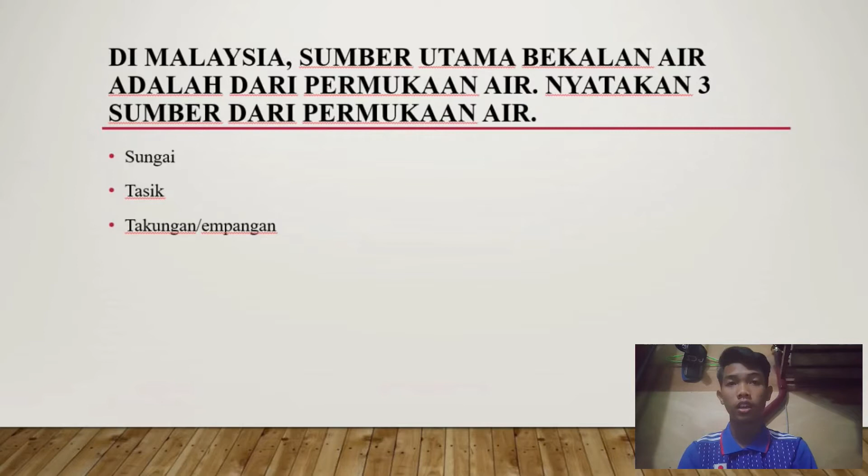Seterusnya, terangkan dengan jelas parameter-parameter sifat air: pertama kekeruhan, dan kedua pH. Kekeruhan adalah air yang mempunyai partikel koloid yang halus, contohnya sisa-sisa tanah yang halus yang terdapat dalam air.

Yang kedua adalah pH. pH adalah ciri-ciri kimia, iaitu sifat asid atau alkali. Dalam loji rawatan air, pH akan mempengaruhi proses penyahjangkitan kuman yang menggunakan klorin. pH juga mempengaruhi aktiviti bakteria.

Soalan terakhir: kenal pasti 3 jenis bahan pencemaran yang perlu dikeluarkan dari air minuman. Yang pertama adalah fizikal, iaitu rasa dan bau seperti bau busuk, gas H2S daripada reputan haiwan, warna air yang tidak jernih, dan kekeruhan iaitu air yang mempunyai partikel koloid yang halus.

Suhu yang tinggi membolehkan kewujudan bakteria. Konduktiviti adalah keberadaan arus elektrik yang menunjukkan adanya garam yang terlarut.

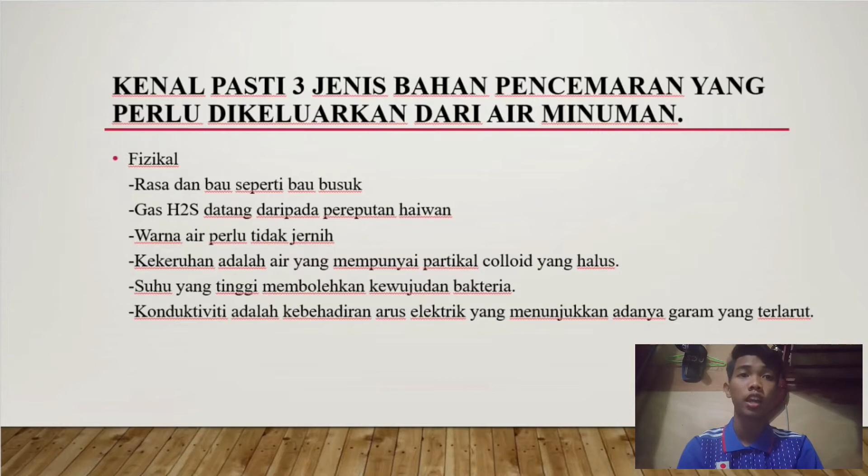Yang kedua iaitu biologi. Bakteria atau kuman yang menyebabkan penyakit dan kematian. Alga adalah tumbuhan akuatik yang paling halus. Virus boleh menyebabkan penyakit demam panas. Protozoa iaitu lebih besar daripada bakteria.

Itu bahagian biologi. Seterusnya kimia: nilai pH iaitu asid atau alkali. Jika oksigen terlarut kurang dalam air, maka pencemaran tinggi. Sebatian organik datang daripada organisma dan tumbuhan yang mati dan mereput. Nutrien iaitu bahan yang boleh mencemarkan air seperti peracunan dan pembajaan.

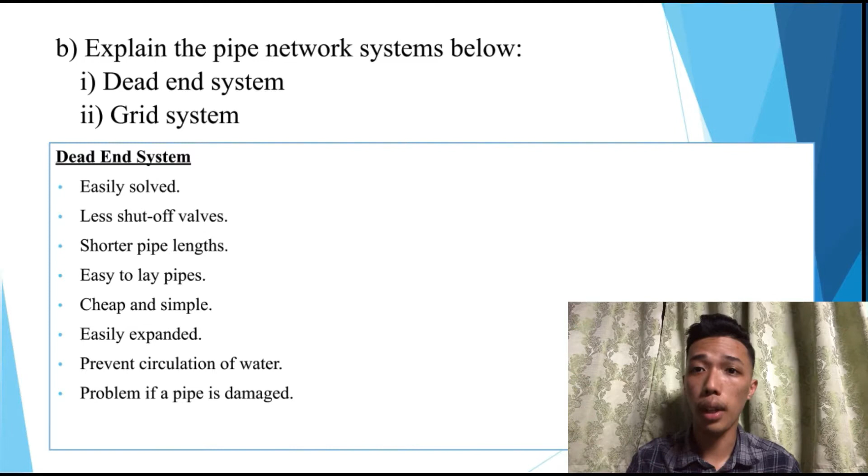Next, grid system: less discharge, friction loss, and pipe size considerations. Not a problem if a pipe is damaged. Good for firefighting. Requires more pipelines and shut-off valves. High cost of construction, and the design is difficult and expensive.

The third question is, interpret the following underground pipe leakage determination methods: first, visual inspection, and second, leak noise sounding contactor. For visual inspection, we use clues to detect leaks like wet soil surface, green grass during drought season, and clean water flowing into the drain.

We can also detect using a chlorine test. The second method, leak noise sounding contactor, is more efficient and accurate in iron pipes, not in plastic. It measures at two suspected points by vibration or sound, where vibrations are transmitted from the sensor to the conductor.

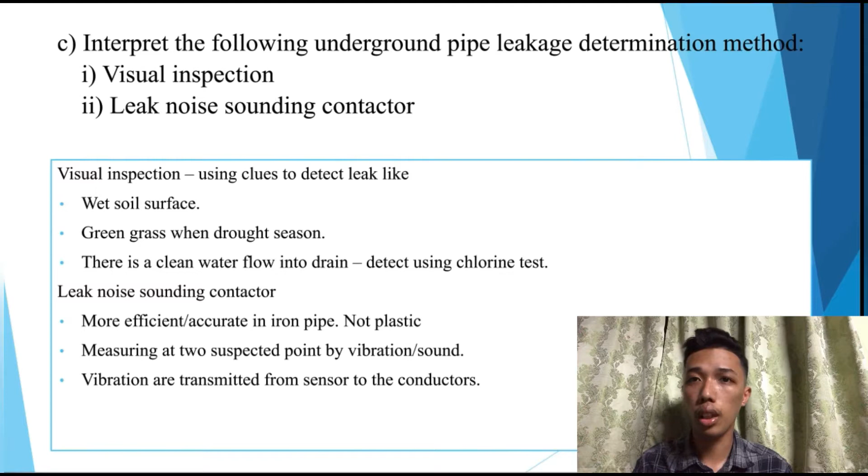The first part: difference between separate system and combined system. Separate system has two pipes, one carrying storm water, the second carrying sanitary sewage. Combined system has only one pipe; sanitary sewage from inside homes and businesses flushes and drains into the pipe, and when it rains, storm water flows into the same pipe and mixes with raw sewage.

Separate system is used in housing and urban areas, while combined system is used in rural areas. Separate system is used mainly in residential areas or cities, but combined system is used in towns where streets are narrow and rainfall is less than moderate.

Advantage of separate system: no treatment needed for runoff and minimum sewer size. Advantage of combined system: installation is easy with less piping, thus saving cost. Disadvantage of separate system is more pipes resulting in increased cost, and the disadvantage of combined system is problems in handling.

Next, we need to calculate the minimum gradient and the flow rate by using the Manning formula. First we need to find the M value, which is 0.0875, and after that we need to find the C value, which we get as 1.4354. After that, using the Manning formula, we get I, which is the gradient.

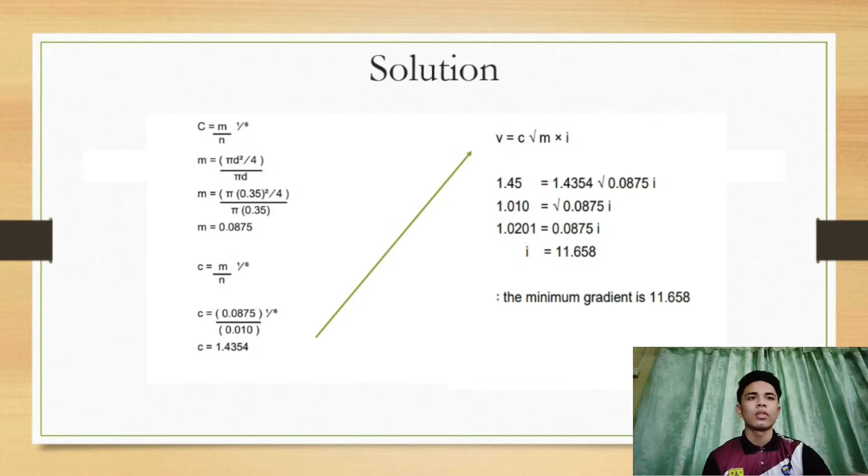V is also given as 1.45, and the minimum gradient we get is 11.658.

Okay, the next question is we need to calculate the sewer pipe diameter needed for that residential area. The data has been given, we just need to put the value into the equation.

Okay, the first one we need to find D, which is 0.0523. After that, we need to multiply water demand per capita times flow rate factor and times how many houses at the residential area.

We get 2,500, and then we need to multiply with the D we get just now. After that, we get the value is 4,314.75. So the answer is 4,314.75 needed for that residential area.

That's all for my presentation.

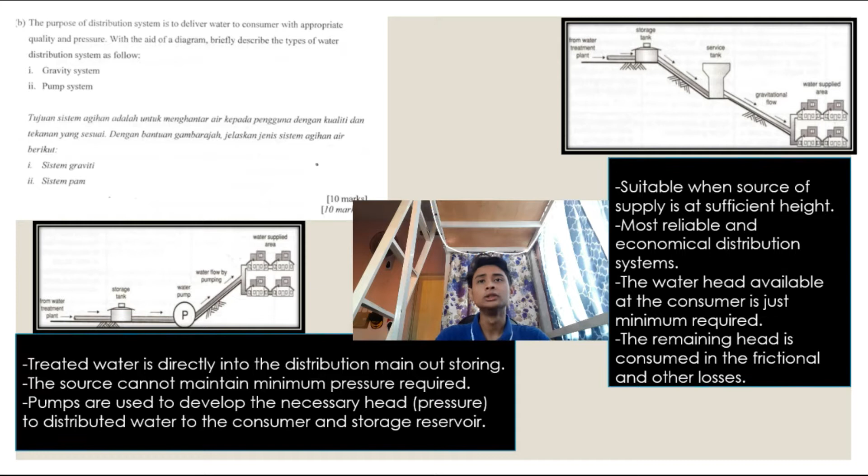For question C, loss of water due to leakage is a common phenomenon observed practically in a water distribution system. However, the leakage volume can be reduced significantly if the occurrence of leakage is detected within minimal time after its occurrence. Interpret the leakage control methods below.

One is gas tracer, the second is passive control, the third is pressure control, and the last one is visual inspection.

For the tracer gas method, a portable gas sensor is used to detect non-toxic gas. It escapes through leaks in the pipe and rises through the surrounding soil to the ground surface. The tracer gas detection machines are fast and easy to use, and also environment friendly.

For passive control, leakage will be fixed based on reports from the concerned community, fixing based on complaint reports, and sometimes considering new piping in the area. This method can be justified in areas with plentiful or low cost supplies, and is often practiced in a less developed supply system where the occurrence of underground leakage is not well understood. It is therefore often a first step to improvement.

The third one is pressure control, used in areas that have high pressure changes. Small reductions in pressure will reduce leakage significantly, but for most piping materials like metal, pressure reducing could become a problem due to internal pipe crusting. Typical methods used are the pressure reducing valve, reducing pumping head, and the pressure break tank.

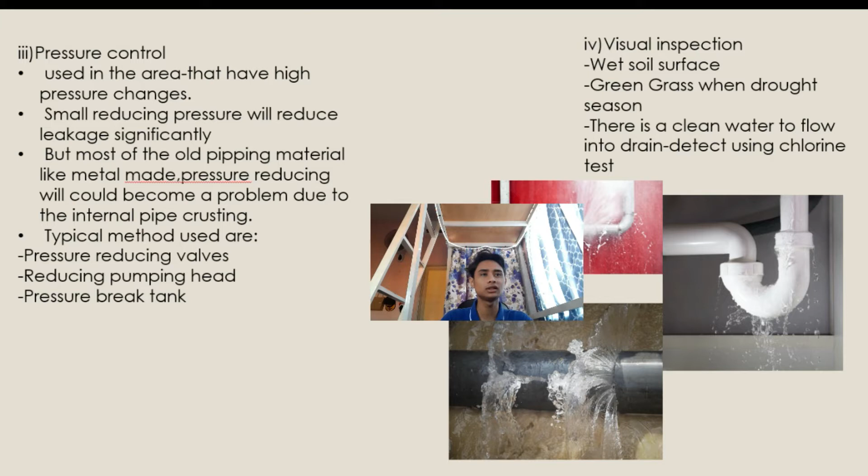The last one is visual inspection, used on wet soil surfaces and green grass during drought season. Also, if there is clean water flowing into the drain, it is detected using a chlorine test. That's all for me.

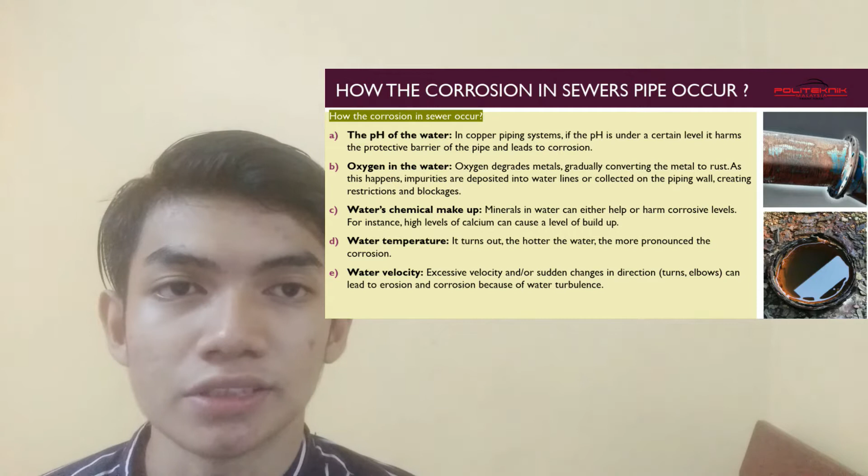Last question is to calculate the flow rate using the Manning formula. The formula given is V equal to 1 over N, times M to the power 2 over 3, times S to the power 1 over 2. The information given is D equal to 2 meters, gradient is 1:1000, the coefficient N is 0.013, and the depth is 1 meter.

The solution is V equal to 1 over 0.013 times bracket pi times 2 squared over 4, over pi times 2, close bracket, power to 2 over 3, times bracket 1 over 1000 close bracket power to 1 over 2. The answer is V equal to 0.2025 meter per second. That's all from me. Thank you.

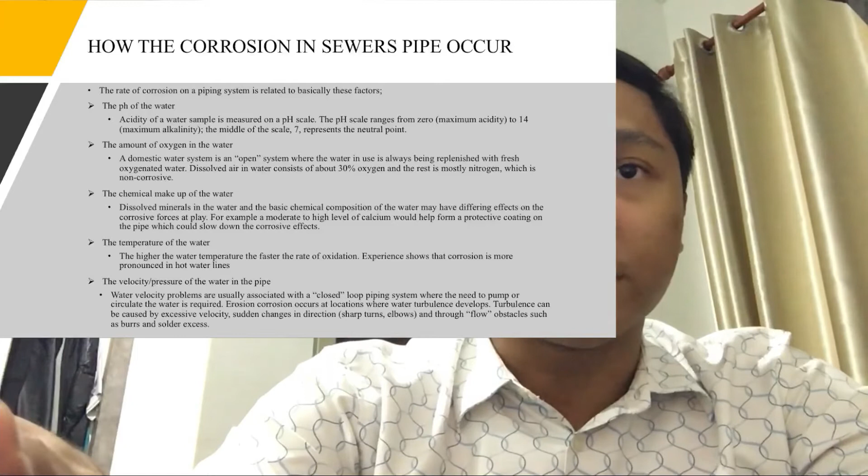Number 4, the temperature of the water - the higher the water temperature, the faster the rate of oxidation. Experience shows corrosion is more pronounced in hot water lines. The last factor is the velocity pressure of the water in the pipe. Water velocity problems are usually associated with a closed loop piping system where water must be pumped or circulated. Erosion corrosion occurs at locations where water turbulence develops, which can be caused by excessive velocity, sudden changes in direction, sharp turns or elbows, and flow obstacles such as burrs and solder excess.

And moving on to the last question, which is calculate the flow rate using the following Manning formula. The Manning formula as given in the slide is V equals 1 over n times R power of 2 over 3 times I power of 1 over 2, or square root I.

The diameter is 2 meters, gradient is 1:1000, depth is 1 meter, and coefficient n is 0.013. So we substitute all the data in the formula.

V is equivalent to 1 over 0.013 times pi times 2 times 2 squared over 4 over pi times 2, in bracket, power of 2 over 3, times 1 over 1000 power of half. So it is equivalent to 0.2025 meter per second. And that's all for me.

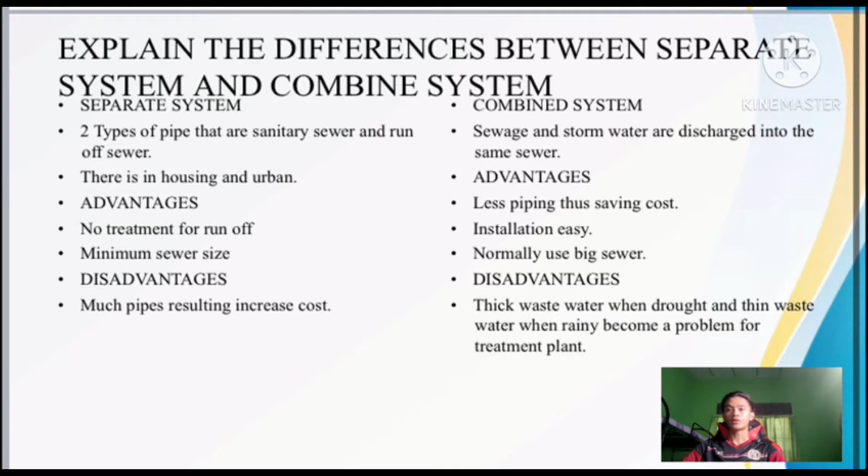Advantages for separate system: no treatment for runoff and minimum sewer size. Advantages for combined system: less piping, thus saving cost, and easier installation. Disadvantages for separate system: much pipe results in increased cost. Disadvantages for combined system: thick wastewater when dry and thin wastewater when rainy become a problem for the treatment plant.

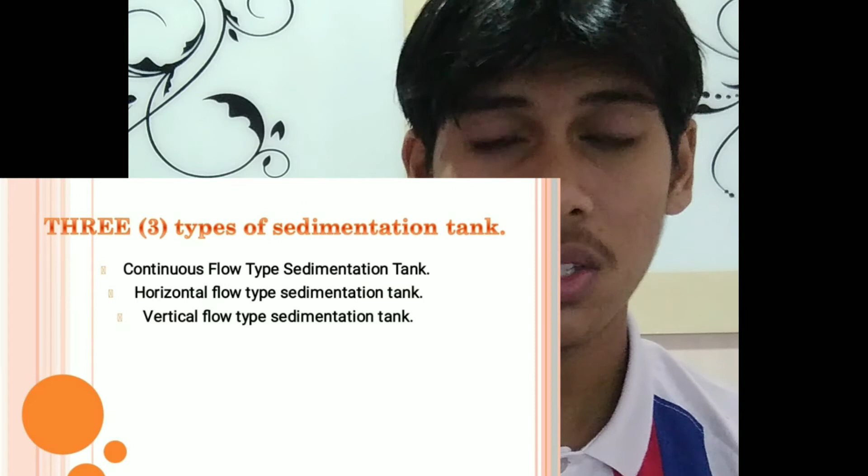Then, the presence of significant amounts of iron and manganese in a water supply. Discuss the problems caused by both metals in a water supply. Iron and manganese are common metallic elements found in the earth's crust. Iron and manganese are not a health concern in drinking water.

Instead, they both have a secondary recommended drinking water standard because they cause aesthetic problems that make the water undesirable to use in the home, and a bitter metallic taste that can make the water unpleasant to drink for both humans and farm animals.

Then the breakpoint curve shape is determined by contact time, temperature, chlorine and ammonia concentration, pH, and water quality. Thank you, that's all from me.

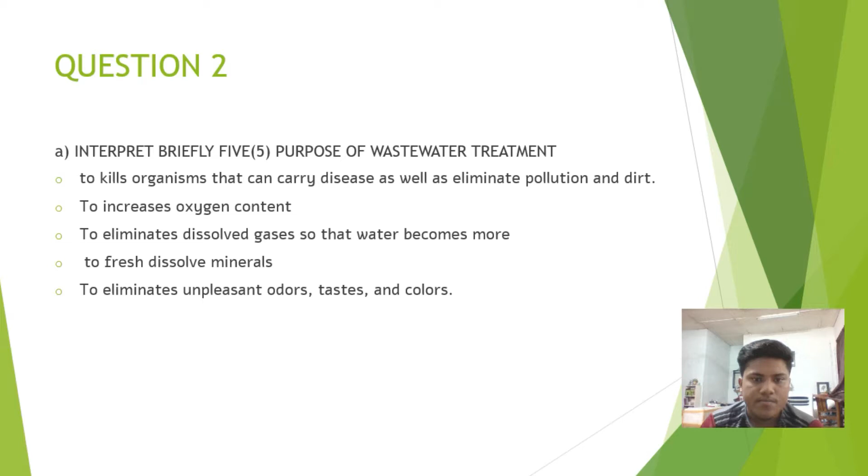The second question is identify 5 differences between oxidation pond and activated sludge. For oxidation pond, it is a shallow basin of controlled shape designed for small communities or industrial plants. Second, the process involves two major steps in the decomposition of organic load in wastewater.

Third, inorganic forms are then used by algae in their photosynthesis reaction. Fourth, photosynthesis is a natural process carried on by green plants in the presence of light. The last is photosynthesis produces oxygen which becomes available to the aerobic microorganisms.

For the activated sludge, microbes require air to live and eat. Second, microbes in this aeration tank use the dissolved and particulate organic load as food. Third, producing more microbes.

The last question is, as a technician, recommend a suitable sewerage system for a small capacity residential in a rural area. For the suitable sewerage, it is the Imhoff tank. The reason why I choose the Imhoff tank is because it was developed to correct the defects of the septic tank. Second, the upper section is the sedimentation compartment and the lower section is the digestion compartment.

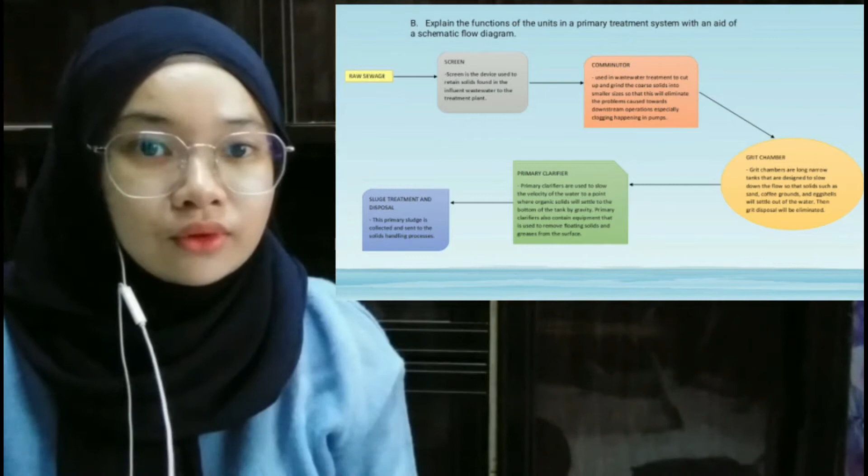Okay, next I move to question B, which is explain the units and the functions of units in a primary treatment system with the aid of a schematic flow diagram. In this diagram, it starts with raw sewage, then goes to screen, then to comminutor, next to grit chamber, then goes to primary clarifier, and the last one is sludge treatment and disposal. As you can see, I have stated the functions in the slide.

Okay, the last question is interpret the operation principles of sewage oxidation pond. The answer is oxidation pond, also called lagoon or stabilization pond, are large and shallow, designed to treat wastewater through the interaction of sunlight, bacteria, and algae.

Algae grows using energy from the sun and carbon dioxide, an inorganic compound released by bacteria in water. During the process of photosynthesis, algae release oxygen needed by aerobic microorganisms. Mechanical aerators are sometimes installed to supply more oxygen, thereby reducing the required size of the pond.

Sludge deposited in the pond must eventually be removed by dredging. Algae remaining in the pond effluent can be removed by filtration or by a combination of chemical treatment and settling. As a result, the organics in the water are partly oxidized and partly converted to algae cells.

Okay, that's all from me. Thank you.

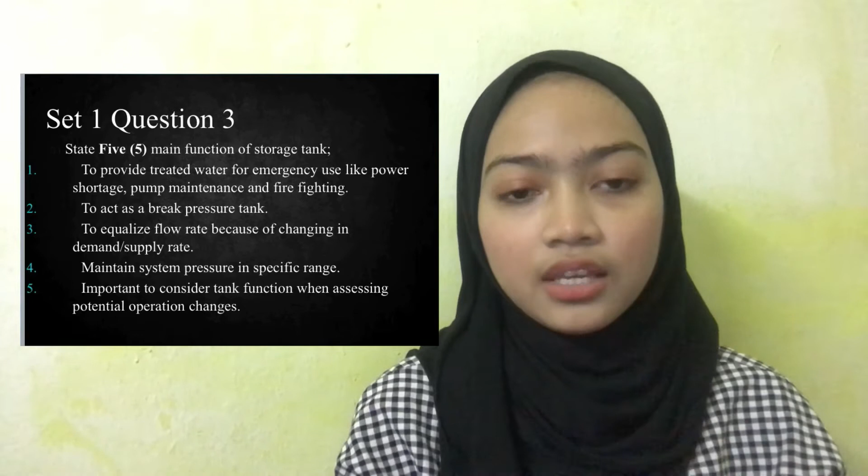A. State 5 main functions of storage tanks. First, to provide treated water for emergency use like power shortage, pump maintenance, and firefighting. Number 2, to act as a break pressure tank. Number 3 is to equalize flow rate because of changing demand or supply rates.

Number 4 is to maintain system pressure within a specific range. And the last one is important to consider tank function when assessing potential operational changes.

B. Explain 5 factors that influence leakage or non-revenue water (NRW). Okay, first is pressure. There are two types of pressure: pressure surge, which is a main danger causing a pipe to burst when the pump stops or the valve closes suddenly, and the second one is pressure change, like minor and neglected ones.

Number 2 is ground movement. As mentioned, expansion and contraction of the soil will cause damage like pipe fatigue.

Number 3 is traffic load. Vibration will cause tiny cracks to the pipe if the bedding is not adequate and proper depth is not maintained.

Number 4 is soil condition. Leaking water in the soil can impair the soil surface because of capillary rise, which will cause the plant to look green, indicating water even in dry season.

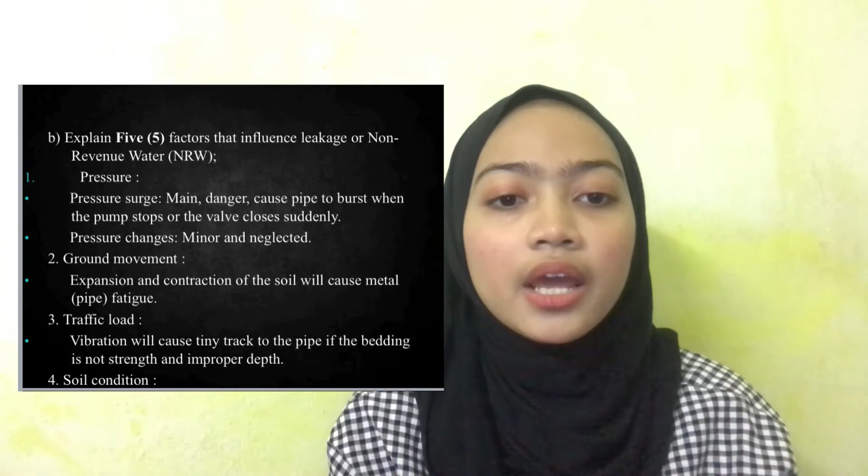And the last one is constant flow valve, to provide an accurate way of controlling flow configuration and used to set flow rate. Question C.

Water distribution method is dependent on the level of source, topography of the area, and other local conditions. Illustrate with explanation the gravity system and pump system.

This is a gravity system, which has an elevated water supply. This system is just like water supplied from a higher place to a lower place, like a treatment plant located at a high ground, supplying to users below.

Friction in piping can cause energy loss, which eventually can cause static head issues. This makes end users experience low water pressure from the tap. The advantages are reliability and low operation cost, suitable for communities at lower ground.

The disadvantage is that static head will cause a drop in pressure, leading to the need for a pump system, which has a pumping station and water supply.

This system is used for low pressure end users and is located on lower ground than the end user, and water is directly pumped to the delivery pipe.

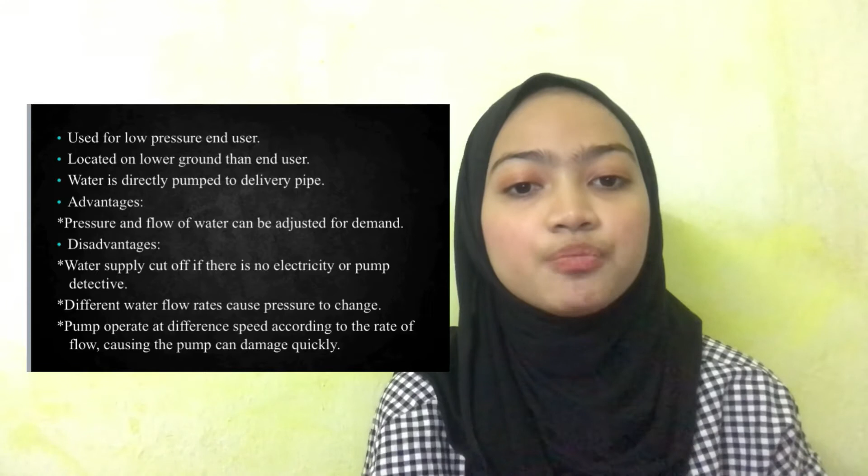Advantage: pressure and flow of water can be adjusted based on demand. Disadvantage: water supply is cut off if there is no electricity or the pump is defective, and different water flow rates cause pressure changes; pump operation at different speeds according to flow rate can cause the pump to damage quickly.

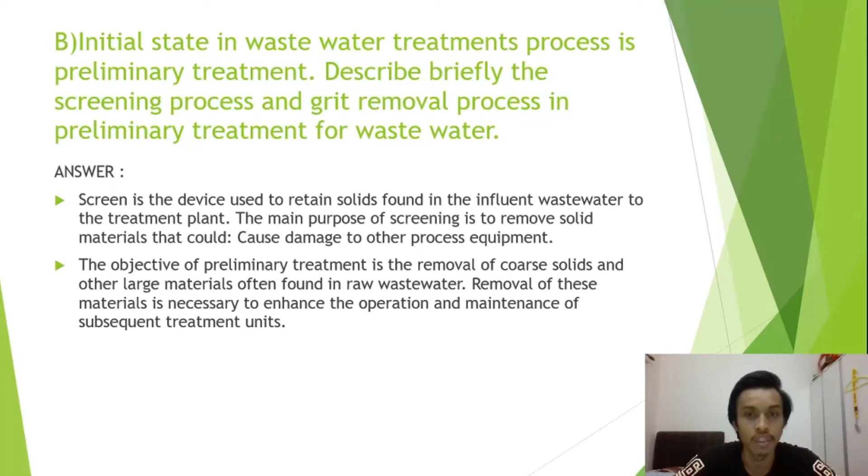The objective of preliminary treatment is the removal of coarse solids and other large material often found in raw wastewater. Removal of this material is necessary to enhance the operation and maintenance of subsequent treatment units.

The next slide is question C. Illustrate how an individual septic tank works. The answer is: a septic tank works by allowing waste to separate into 3 layers: solid, effluent, and scum.

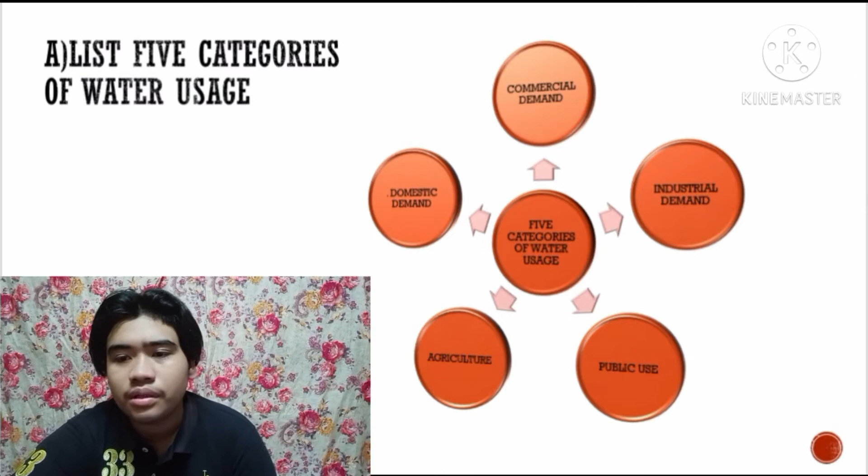The first question is to list 5 categories of water usage. First, commercial demand. Second, industrial demand. Third, public use. Fourth, agriculture. Fifth, domestic demand.

Now we move to the second question: there is a probable population in the year 2040. First, we just need to make a table with year, resident, and resident increase, and fill out the data that we get from the question, from which we can get the resident increase.

The total of resident increase is 83,625, and after dividing by 4, the answer is 20,906.25. Adding this to the resident in 2020, we get 111,777.25. After doing the same steps, the final answer is 153,589.75.

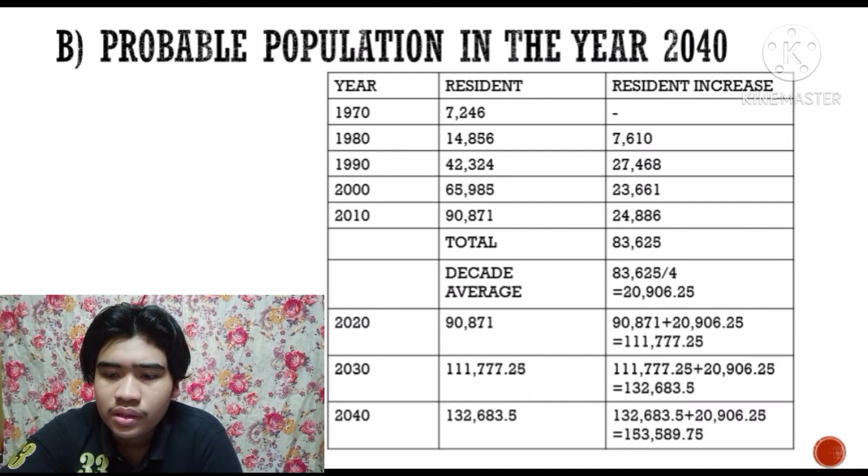Now we move to the final question, which is to find water demand. First, we list the data from the question: total population is 356,000, water demand is 225 liters per capita per day, and design factor is 1.0.

Water coverage is 90%, and NRW is 21%. The formula is WD equals (PN multiplied by Q multiplied by F1 multiplied by F2) plus NRW, and the final answer is 87,228,900 liters per day. That's all.

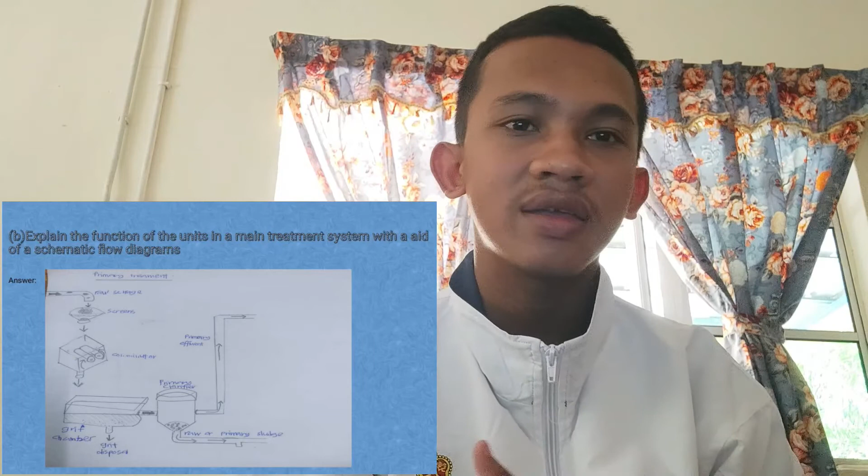Second question is: explain the function of the units in a main treatment system with the aid of a schematic flow diagram. You can see the answer in the slide beside me.

The last question is: interpret the operating principle of a sewage oxidation pond. The answer is: in the first pond, solid and organic matter settle down to form sludge digested by microorganisms.

In the second pond, algae growing on the surface provide water with oxygen, leading to both anaerobic digestion and aerobic oxidation of organic pollutants. Due to the activity of algae, the pH increases, which leads to inactivation of pathogens and volatilization of ammonia. The latter ponds serve for the retention of stable solids and the inactivation of pathogenic microorganisms through pH heating and solar radiation.

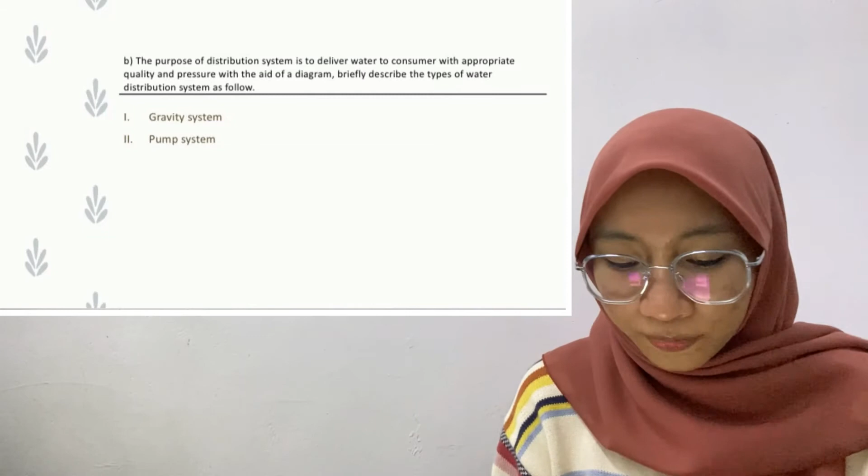Question B: the purpose of a distribution system is to deliver water to consumers with appropriate quality and pressure. With the aid of a diagram, briefly describe the types of water distribution systems as follows: number 1 is gravity system, and number 2 is pump system.

Friction in piping can cause energy loss, which eventually can cause static head. This will make the end user experience low water pressure at the tap. Advantages of the gravity system are: reliable, low operation costs, and suitable for communities at lower ground.

Gravity system also has disadvantages, which is that static head will cause a drop in pressure and cause end users to be unhappy.

Advantages for the pump system: pressure and flow of water can be adjusted for demand. Disadvantages for pump system: water supply is cut off if there is no electricity or the pump is defective. Different water flow rates cause pressure changes and affect the pump.

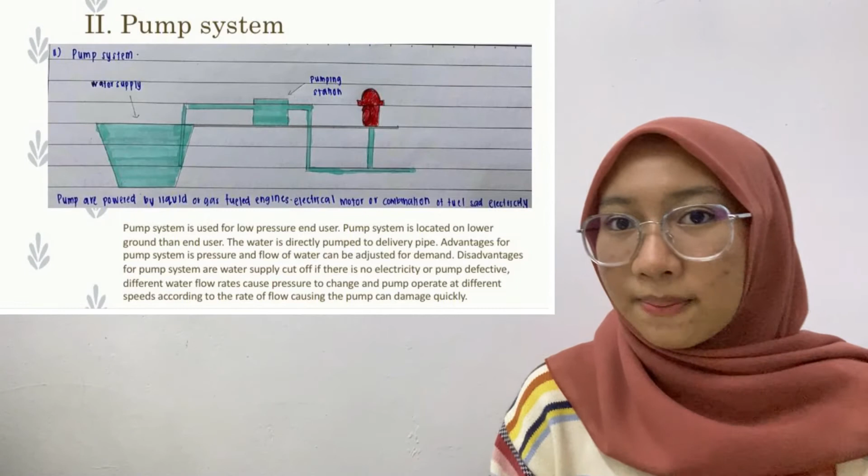Question 4C. Loss of water due to leakage is a common phenomenon observed practically in all water distribution systems. However, the leakage volume can be reduced significantly if the occurrence of leakage is detected within minimal time after it occurs.

Interpret the leakage control methods below: gas tracer, passive control, pressure control, and visual inspection. Gas tracer is one of the methods to detect leakage. It is a portable gas sensor used to detect non-toxic gas as it escapes through leaks in a pipe and rises through the surrounding soil to the ground surface.

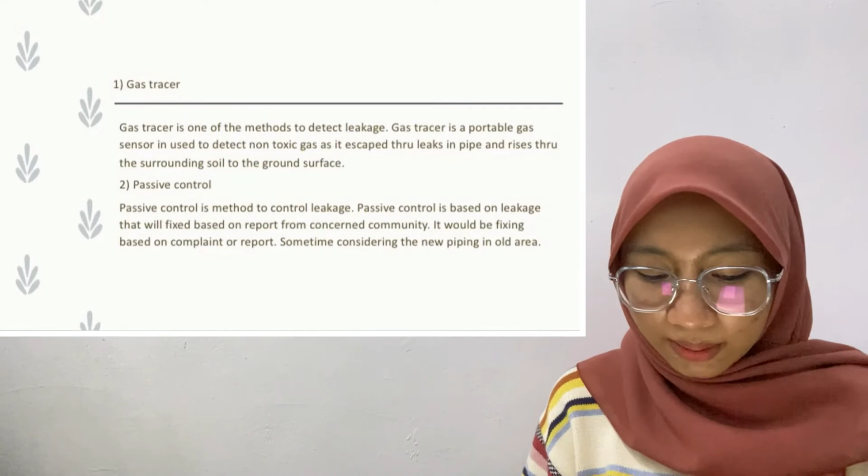For passive control, it is a method to control leakage based on reports from the concerned community. It will be fixed based on complaints or reports, sometimes considering new piping in the area.

For number 3, pressure control: it is used in areas that have high pressure changes. With small reducing, it will reduce leakage significantly, but most old piping material, like metal, made pressure reducing could become a problem due to internal piping crusting.

Typical methods used are pressure reducing valve, reducing pumping head, and pressure break tank. Lastly is visual inspection, which is a method to detect leakage, using clues such as wet soil surface, green grass during drought season,

and clean water flowing into drains, detected using a chlorine test. That is all from me for this question, thank you for watching and bye.

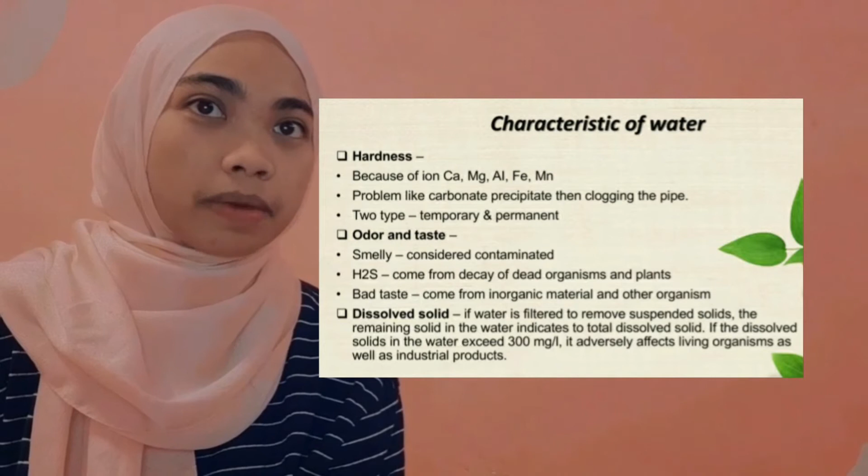Dissolved solid: if water is filtered to remove suspended solid, the remaining solid in water indicates total dissolved solid. pH value stands for the power of hydrogen, a numerical value determined by the molar concentration of hydrogen ions, affecting chemical processes and biological life. Protozoa are much bigger than bacteria and eat bacteria, reducing organic load. If there's too much it can cause problems, but if too little, treatment is not efficient.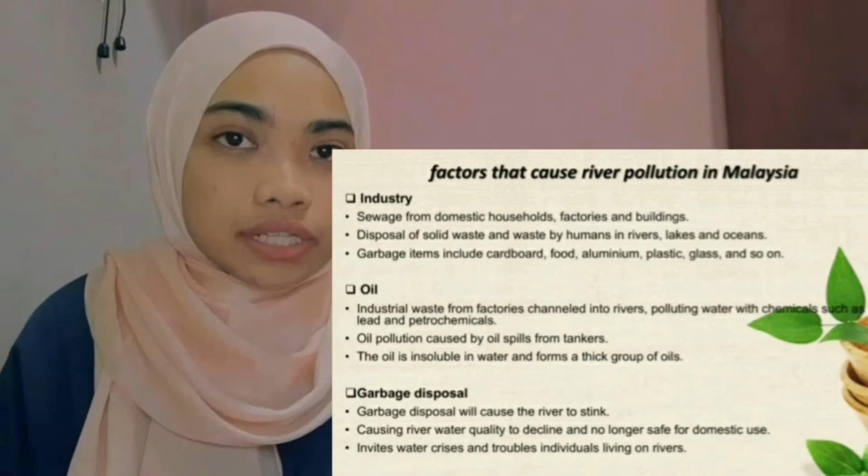That causes river pollution in Malaysia. First, industry: sewage from domestic buildings and factories, and disposal of solid waste by humans in the river. Second, oil: industrial waste from factories channels insoluble material into water, forming a thick layer. Third, garbage disposal causes river water quality to decline and no longer be safe for domestic use, also inviting water crisis and troubles for individuals living by the river.

Fourth, throwing of plastic in the river. It is lightweight and floats easily. Plastics are non-biodegradable and can affect the survival of marine life for a very long time. Lastly is thermal pollution: with rising temperature in the water, it can reduce the amount of oxygen present in the water and decrease the level of aquatic life that the river can support. That's it, thank you.

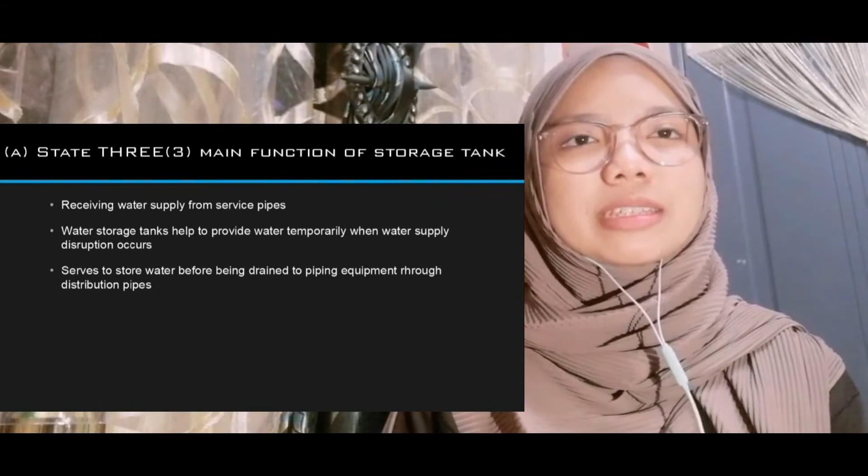State 3 main functions of the storage tank. First, it receives water supply from the service pipe. Second, the water storage tank helps provide water temporarily when water supply disruption occurs. Third, it serves to store water before it is drained to piping equipment through distribution pipes.

Explain with a diagram the layout of the distribution system below. The dead end system is usually found in cities that are not fully planned. This system evolves according to urban development, so it is suitable for cities that grow irregularly, or for housing schemes, as they are low cost and easy for future development.

Second is the grid iron system. In this system, the reticulation pipes and their substations are connected to each other. These pipelines are commonly used in planned urban areas.

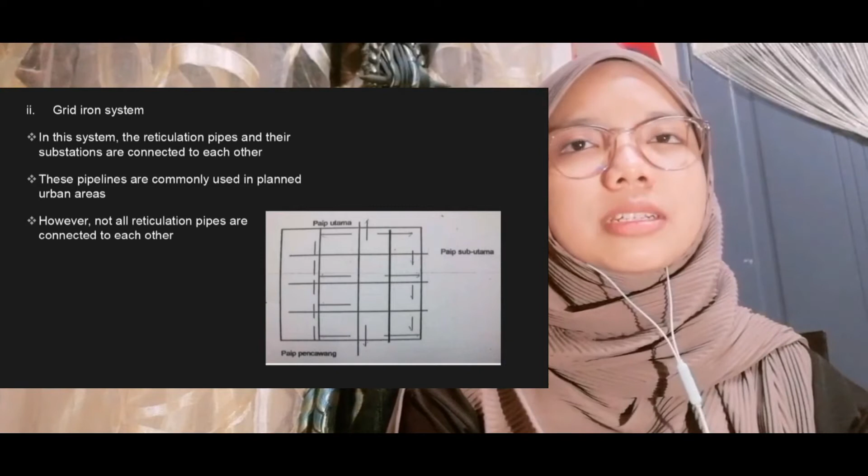List 4 types of valves, one of the components in the water distribution system. First, a gate valve. Second, a butterfly valve. Third, an air valve. Fourth, a one-way valve.

List the advantages and disadvantages of the pump system and gravity system in a water distribution system. In this system, treated water is pumped out at a constant rate to be stored in a high-level water storage. The distribution of water to users from the storage flows through the force of gravity. This system is more often used due to its effectiveness and low cost, and is used in areas with the desired surface area.

Water pumps are used to pump treated water from low ground to be conveyed to the storage tank. The position of the storage tank in high areas creates pump pressure on the water to be conveyed to customer premises in low areas.

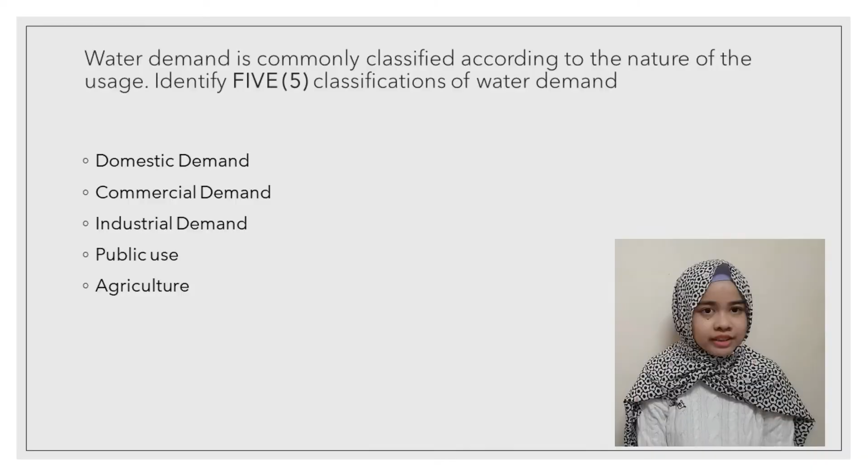Identify 5 classifications of water demand. Firstly is domestic demand, commercial demand, industry demand, public use, and agriculture. Factors affecting demand of water usage are firstly total population served, second consumption per capita, design factor, and lastly additional demand factors.

The process of destabilization is to reduce the charge of the particles and allow them to attach to other particles so that they can be removed in the next process, which is coagulation or flocculation.

The particulates in raw water are mainly clay, silica, fulvic and humic acids, bacteria, virus, and organic particulates. Most coagulants used are cationic, such as aluminium, ferrum, sulfur, lime, and cationic organic polymers.

Filtration is the most important and reliable process in water treatment to remove particulate, suspended, or colloidal impurities from water. Coagulation, flocculation, and sedimentation are used to assist the filtration process to function more effectively. The water leaving the sedimentation tank still contains floc particles.

There are two types of filtration: one based on filtration rate, and another based on driving force.

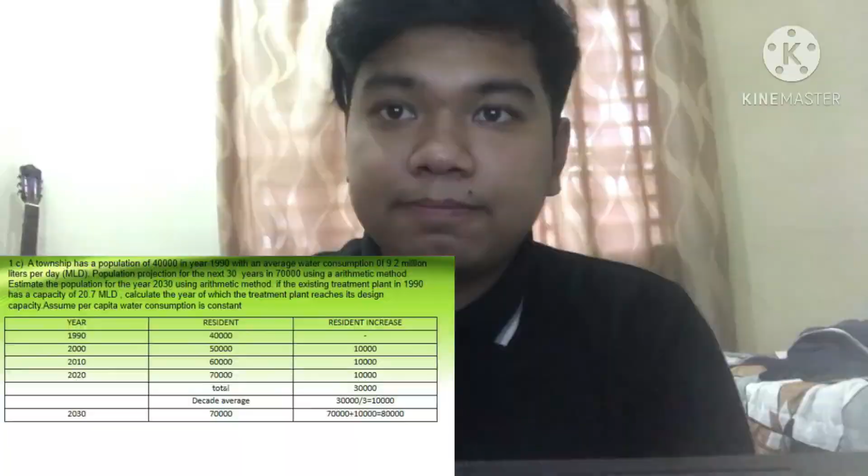For the first question, state 5 main functions of a storage tank. First, to provide treated water for emergency use, like power shortage, pump malfunction, and firefighting. Second, to act as a break pressure tank. Next, to increase flow rate due to changes in demand rate and supply rate. Next, to provide treated water storage to minimize supply disruption during pipe damage. Next, to increase the daily pumping rate.

For the next question, explain 5 factors influencing leaking or non-revenue water. First is pressure: pressure surges are a main danger and cause pipe bursts when the pump stops or the valve closes suddenly; pressure change is often minor and neglected. Next, ground movement: expansion and contraction of the soil will cause metal pipe fatigue. Next, traffic load: vibration will cause tiny cracks to the pipe if the bedding is not strengthened properly.

Next is material and workmanship quality: fitting materials such as valves and joints are not suitable or are of poor quality, and installation, fixing, and setting up are not done with good workmanship. The last one is pipe lifespan, which depends on material properties like durability, internal or external corrosion resistance, impact load, tensile and bending strength, due to weak bedding.

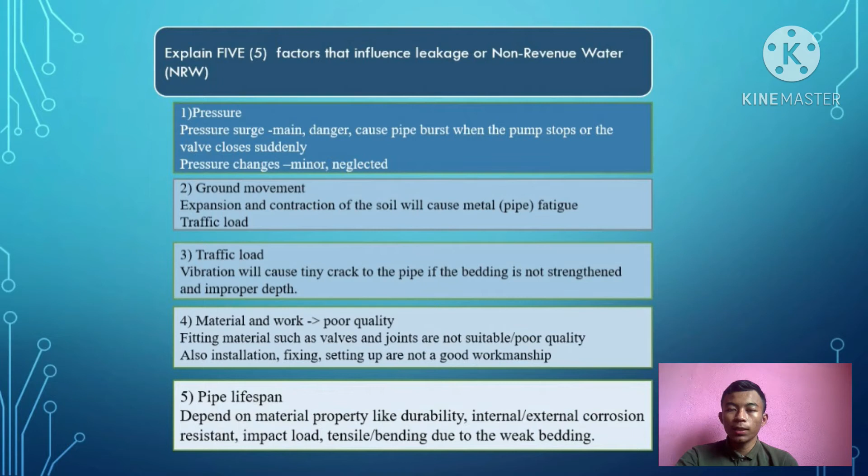Illustrate with explanation to the gravity system and pump system.

For gravity system, water is supplied from the highest place to the lower place. Treatment plant is located at higher ground from the user. Friction in piping can cause energy loss, which eventually can cause a static head. This will make end user experience slow water flow at the top.

Next, for pump system. Pump systems are used for low pressure end users, located at lower ground than the end user, and water is directly pumped to the delivery pipes. That's all for me. Thank you.

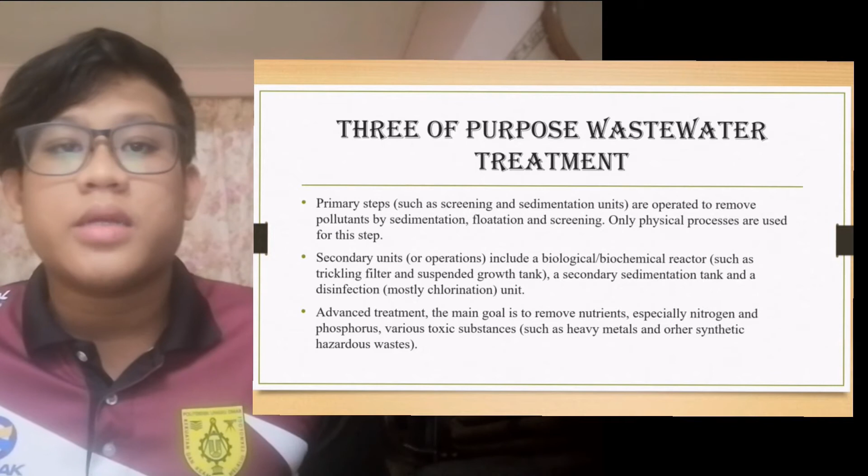Process involved in wastewater treatment from hospital. Preliminary stage of treatment: as the first stage, preliminary treatment process is essential in most sewage treatment plants. It removes items such as sticks, rags and other large debris and heavy inorganic solids contained in the hotel influent through bar screens. Removal of this material protects plant equipment from damage. The inorganic settled is called grit, which is removed using a grit chamber.

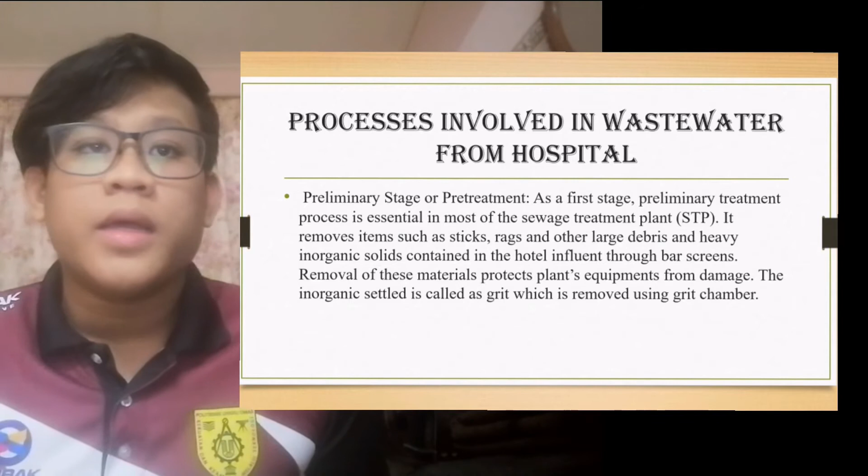This is the second step in the sewage treatment system. Physical separation of solids and grease from wastewater is done in this stage. Wastewater flows into primary clarifier or carrier for a few hours to allow solid particles to settle down, and lighter particles float to the top and are skimmed off the tank. The settled solid is called primary sludge or primary effluent, containing about 60 to 70% of solid.

Partly treated wastewater is now subjected to the next treatment level: biological treatment process, which removes dissolved inorganic material present in soluble and colloidal form from the wastewater. Here, bacteria are used to convert the colloidal and dissolved organic matter.

The partly treated wastewater from primary tank flows into the aeration tank, and air is supplied through an air blower to provide oxygen for microbes. The wastewater then flows into a secondary clarifier where solids settle down, called secondary sludge. Part of it cycles as activated sludge process, and the remaining is mixed with primary sludge, which is sent to the sludge digestion tank and then disposed of. This stage removes about 90% of inorganic solid.

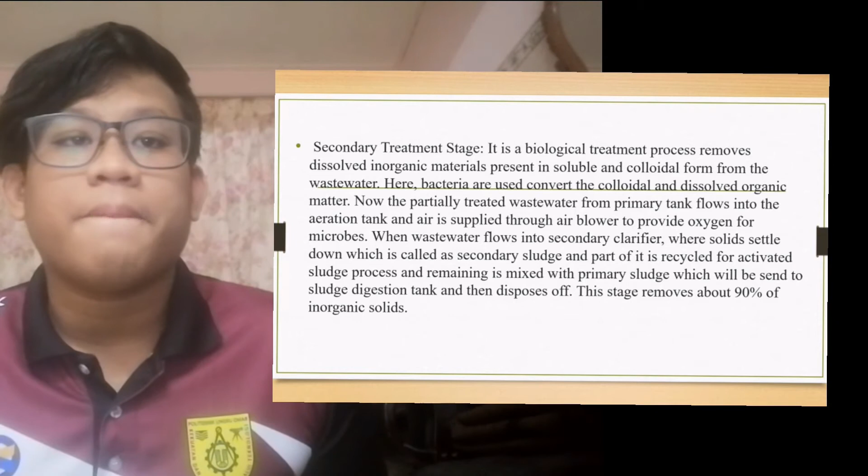The last stage is tertiary treatment of the STP. This stage removes the suspended solids and organic matter which were not removed in secondary treatment. The pathogenic microorganisms not removed during biological treatment will be removed by the process called disinfection. Several disinfection agents can be used depending on wastewater condition, achieved by means of physical or chemical disinfection like chlorine, UV light, or ozone. Now, the disinfected wastewater is suitable for disposal or use.

If the water is not treated accurately, the harmful contaminants in the sewage are hazardous to human health and the natural environment. So sewage treatment plants in hospitals are always necessary to reduce harmful impact on the environment. That's all for me. Thank you.

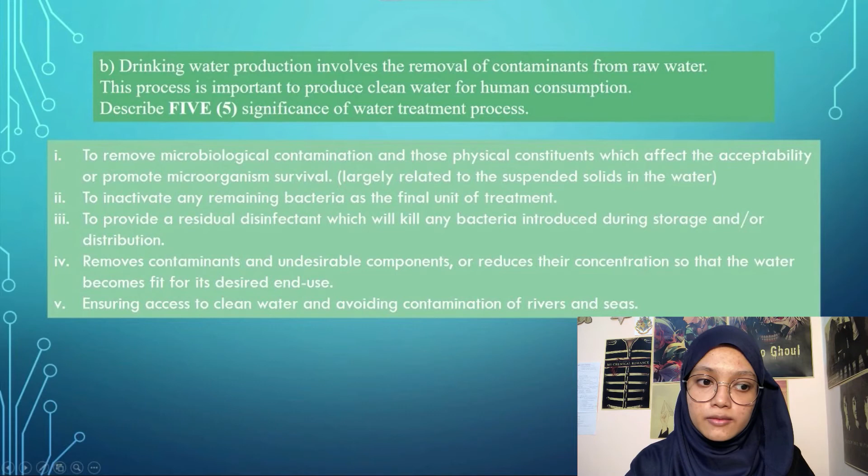Next question: list four chemical processes in a water treatment system. First is iron and manganese removal, second is water softening, third is disinfection, and the fourth is pH adjustment.

Last question: interpret the coagulation and flocculation process in water treatment. Coagulation is the process of destabilization of the negative charge on suspended particulates and colloids at an optimum dose. Meanwhile, flocculation is the agglomeration of destabilized particles and colloids to make settleable or filterable particles.

The purpose of coagulation is to reduce the repelling character of the particles and allow them to attach to other particles so they can be removed in the following process. Flocculation normally involves gentle stirring to enhance contact of destabilized particles and to build floc particles of optimum size, density, and strength.

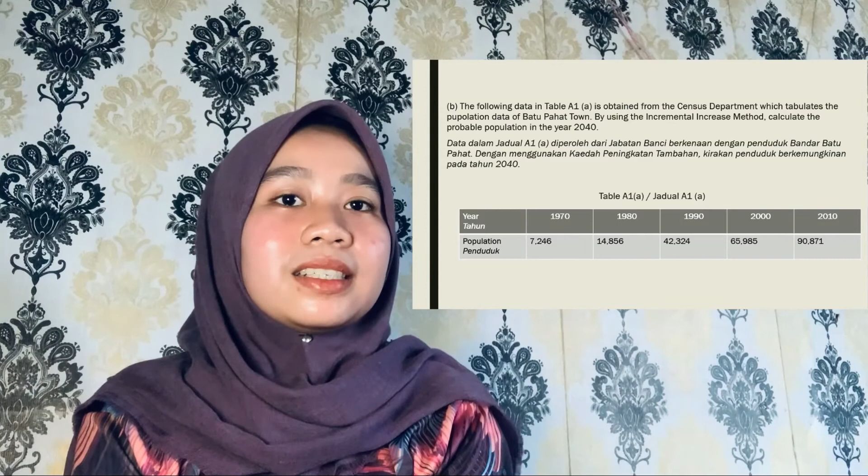For question 1C, calculate the water demand during the years in which water coverage is 90%. Take design factor as 1.0 and non-revenue water as 21%. Use per capita consumption equal to 225 liters per day. Assume there is no industrial water requirement.

Okay, Q equal 225 liters per day, and non-revenue water percentage equal to 21%. Design factor equal 1.0, and water coverage equal 90%. PN 2015 equal to 356,000 people. Entering these into the formula, the final answer is 88.23 million liters per day.

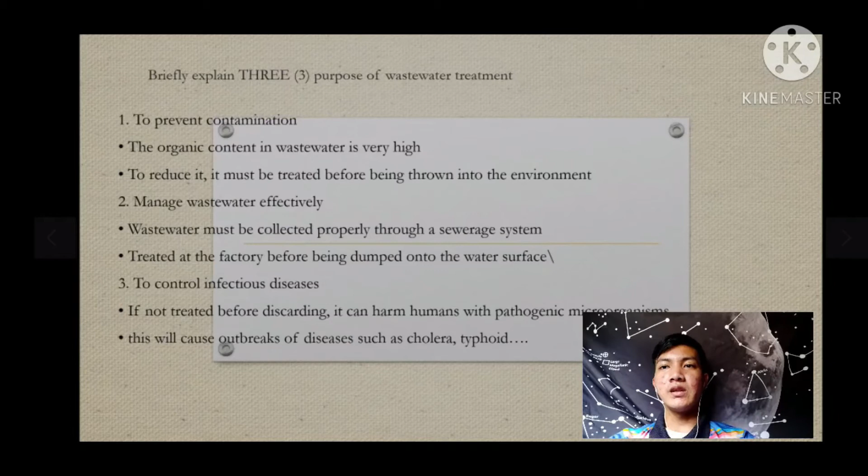Number 3, to control infectious diseases. If not treated before discarding, it can harm humans with pathogenic microorganisms, which can cause outbreaks of diseases such as cholera and typhoid.

Biological sewage treatment is an important and integral part of any wastewater treatment plant that treats wastewater from municipalities or industry. Let's go through the following processes of biological sewage treatment, starting with the oxidation pond and activated sludge process.

Photosynthesis is a natural process carried out by green plants in the presence of light. One of the products of photosynthesis is oxygen, which becomes available to aerobic microorganisms. As a result of the reaction in the pond, the organics in water are partly oxidized and partly converted to algal cell mass.

In the activated sludge process, microbes require air to live, and air is introduced into the tank. Microbes in this aeration tank use the dissolved and particulate organic matter as food. The microbes metabolize the waste material left from the primary treatment, converting it into microorganisms which can be collected and separated from the water in the next step.

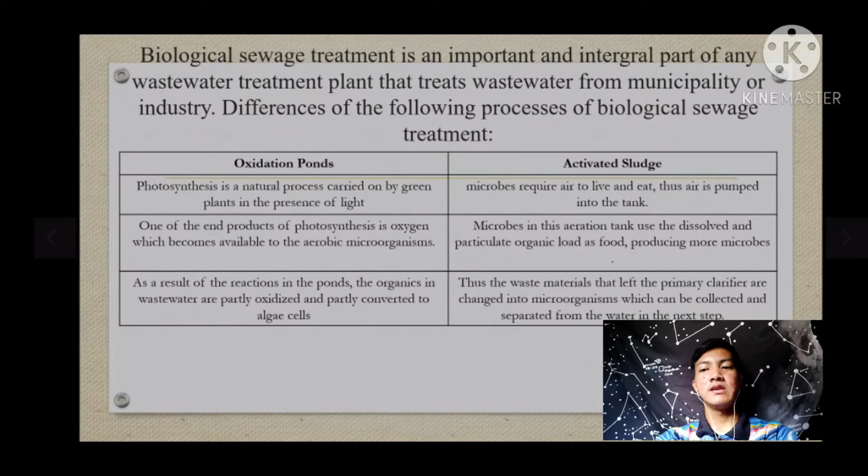Number 3, temporary storage. The treated water will be stored temporarily to assess water quality. This is done so that it's safe for the user to use.

Number 4, distribution. The treated water will be sent to the user through the prescribed system.

Okay, this is all. Thank you, sir.

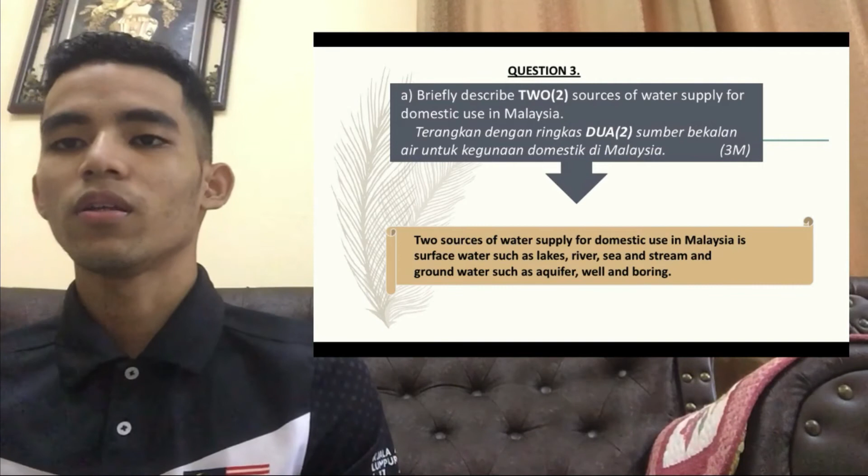For the first question, the answer is two sources of water supply for domestic use in Malaysia: surface water such as lakes, rivers, sea and streams, and another one, groundwater such as aquifer, well and boring.

The answer for question B, first is taste and odor. It is smelly or putrid, that is considered contaminated, that it has H2S, coming from decay of dead organisms and plants, and then bad taste that comes from inorganic material and other organisms.

The answer for hardness is because of ions like Ca, Mg, Al, Fe and Mn. Second, problems like carbonate precipitate, then clogging the pipe. Third, temporary hardness is CO3^-2 and HCO3^-2, treated by boiling and soda. And the permanent hardness is SO4^-2, Cl, NO3^-2, treated with soda.

The answer for protozoa is that it is much bigger than bacteria and eats bacteria. Second, it reduces organic load. And lastly, too much or too little means treatment is not efficient.

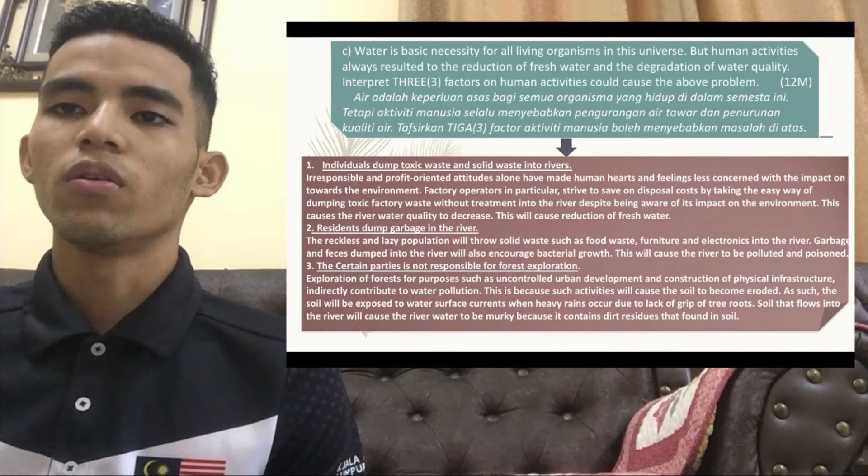The answer for the last question is, first, individuals dump toxic waste and solid waste into the rivers. Irresponsible and profit-oriented attitudes have made humans less concerned with the impact on the environment. Factory operators in particular strive to save on disposal costs by taking the easy way of dumping toxic factory waste without treatment into the river, despite being aware of its impact on the environment. This causes river water quality to decrease and will cause a reduction of fresh water.

Second, residents dump garbage in the river. The reckless and lazy population will throw solid waste such as food waste, furniture and electronics into the rivers. This will cause the river to be polluted and poisoned.

And third, certain parties are not responsible, causing forest exploration. Exploration of forests for purposes such as uncontrolled urban development and construction of physical infrastructure indirectly contributes to water pollution. The soil that flows into the river will cause the river water to be murky because it contains residue found in the soil.

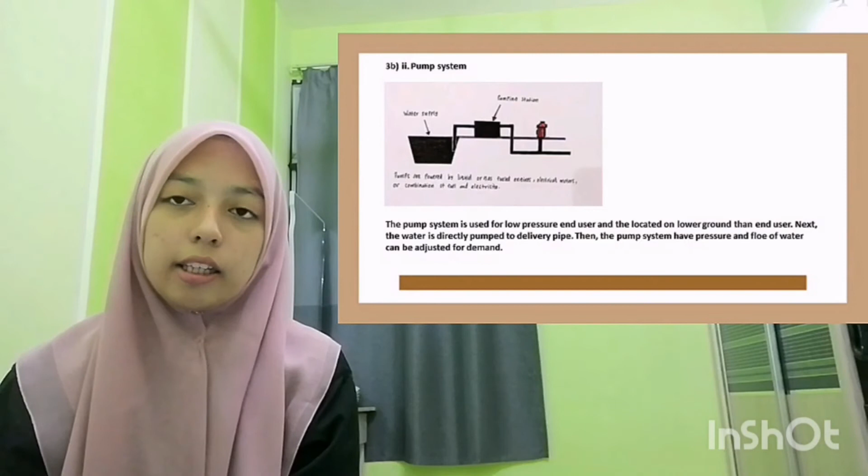For 3B, number 1 is a gravity system, but number 2 is a pump system. We have diagram 2 for the pump system, which is used for pressure, and the user is located on lower ground than the plant.

And our last question is 3C, and the question is interpret the leakage method below. Okay, we have four methods.

Number one is gas tracer. The gas tracer is a portable gas sensor used to detect non-toxic gas.

Number two is passive control, the leakage control method for passive control. Its leakage will be fixed based on the report from the concerned community.

Number three is pressure control. It's used in areas that have high pressure change, and with a small reducing pressure, leakage will be reduced significantly.

The last is visual inspection, a method to detect leakage using clues such as a wet soil surface.

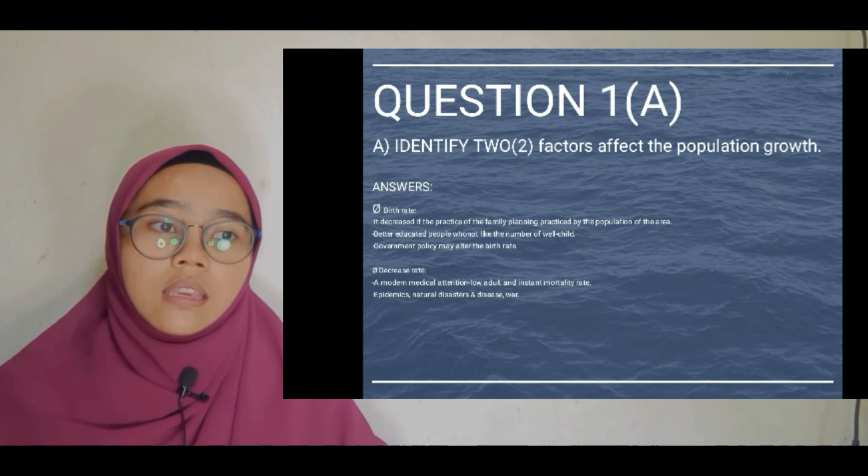The next answer is death rate. Modern medical attention lowers adult and infant mortality rate. The next factor is epidemic, natural disaster, disease, and war.

For the arithmetic method, the assumption used is increase with a fixed rate of population. For the geometrical method, the assumption used is that percent increase in population from decade to decade is fixed. The last one is the depreciation method, where the assumption used is that a population declines due to saturation of development.

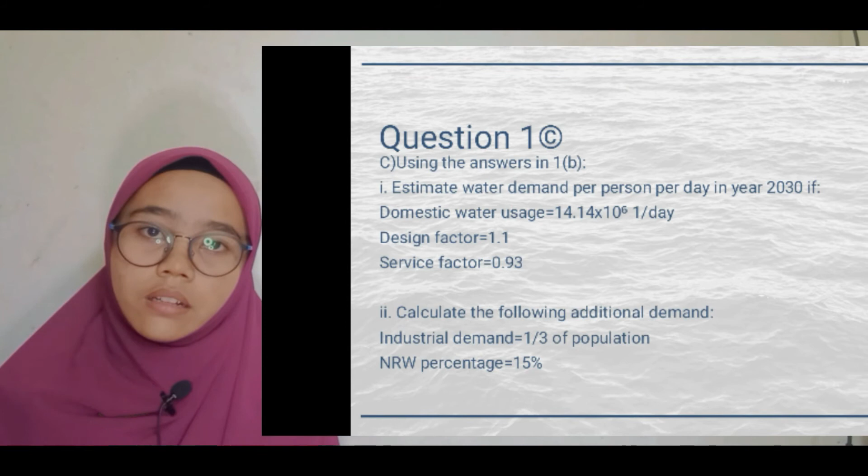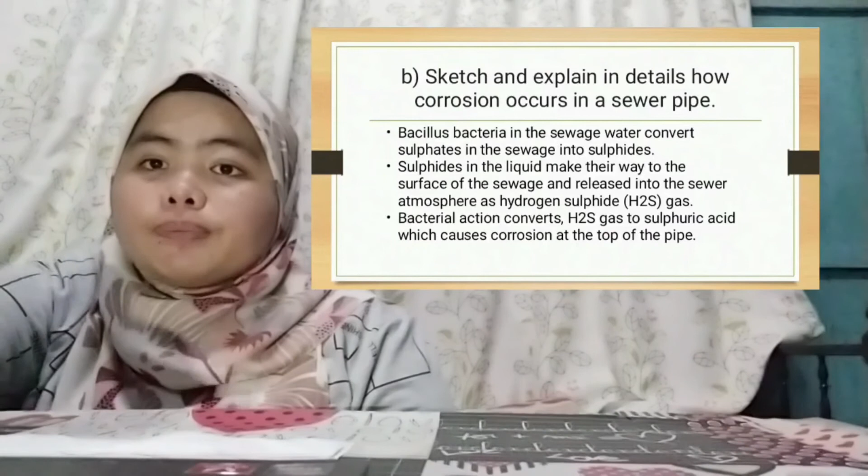Next, sulfide in the liquid makes its way to the surface of the sewage and releases into the sewer atmosphere as hydrogen sulfide (H2S) gas. Last, bacterial action converts H2S gas to sulfuric acid, which causes corrosion at the top of the pipe. This is the sketch showing how corrosion occurs in the sewage pipe.

The last question: a residential scheme has 3 lines of terrace houses comprising 45 housing units. Using Manning's formula to determine the flow velocity, determine the diameter of sewer pipe required, assuming full pipe velocity. The data given: water demand per capita is 225 liters per person per day.

Next, household is 5 persons per unit. The third is flow rate factor is 6, and the fourth is roughness coefficient 0.013, and the last is sewer pipe slope is 1:200.

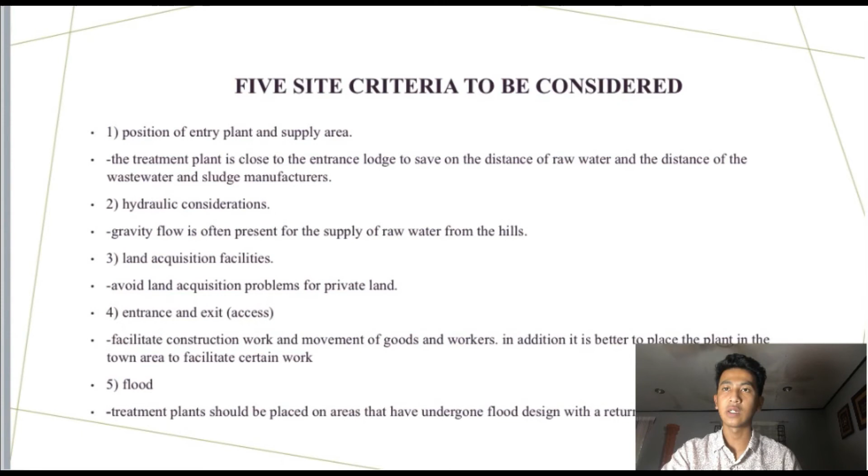Fourthly, ensure it facilitates construction work and movement of goods and workers. In addition, it is better to place the plant in the town area to facilitate certain work. And fifth, the treatment plant should be placed on an area that has undergone flood design with a return period of 100 years.

Thirdly, the principle of coagulation and flocculation process. Firstly, the principles of coagulation. The flow in the coagulation tank is controlled to obtain an optimal temperature. The aluminum dose used forms a good floc and facilitates the sedimentation process.

That's all for me. Thank you.

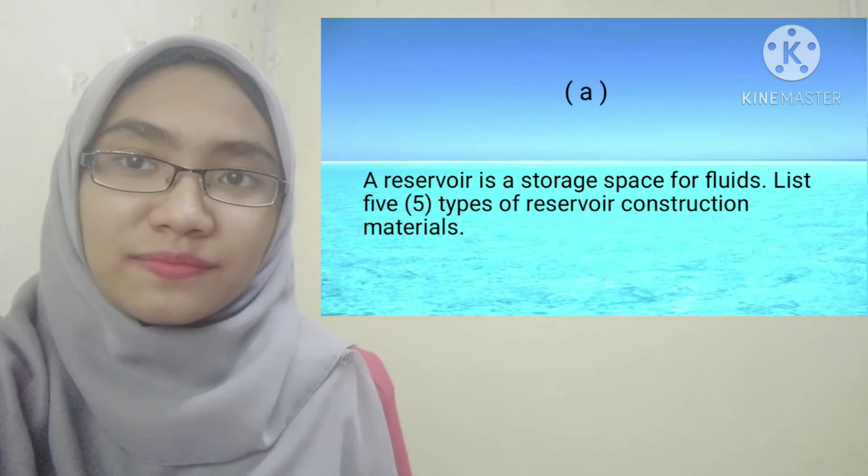Question A. A reservoir is a storage space for fluids. List 5 types of reservoir construction material. The answer for question A is: 1. Reinforced concrete, 2. Pre-stressed concrete, 3. Galvanized pressed steel, 4. Fiberglass reinforced plastic, 5. Steel fused with glass.

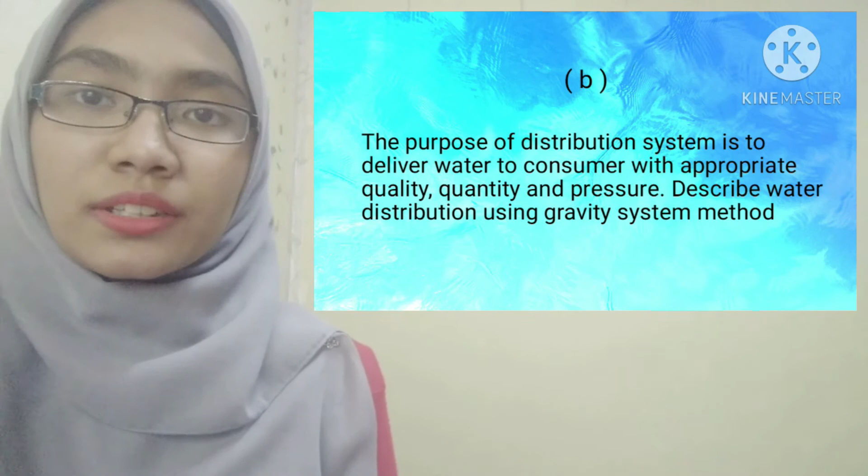Question B. The purpose of the distribution system is to deliver water to consumers with appropriate quality, quantity and pressure. Describe water distribution using the gravity system method. The answer for question B is: for a gravity flow system to work properly, the pipe must run full of water with no airlock. Gravity can then be used to move water over hills and undulations between the spring and the reservoir tank. The method works as long as the spring tank is at the highest point in the system and there is enough height difference between the spring tank and the reservoir tank.

This gives a sufficient flow to the distribution network, once friction losses have been taken into account. They also use gravity to move water to the taps through thinner pipe. This example shows that the tank must be at a higher place, so the water runs out from the tap with good pressure.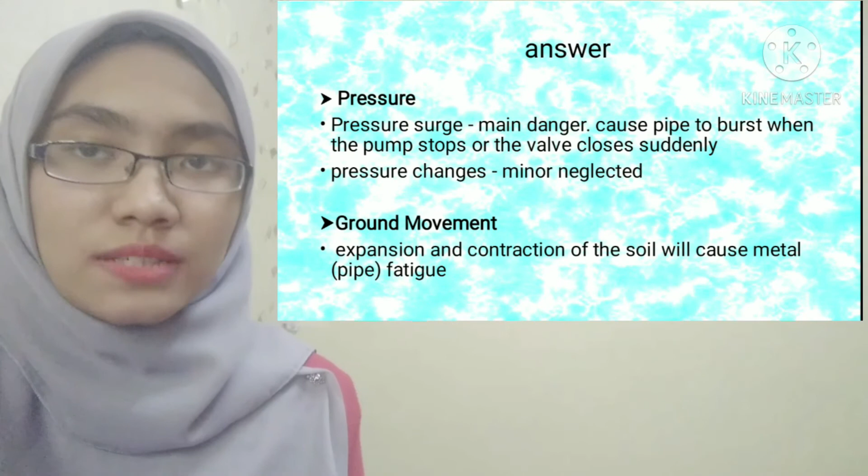Third is rusting in pipe from electrolysis. There are 3 processes. One is internal process, to be exact, high chlorine and acidic conditions. Next is external process, which is different water characteristics. Lastly, iron and copper both have potential difference.

Fourth is soil condition. Leakage water in the soil tank appears on the soil surface because of capillary rise. Wet soil causes plants to look green, indicating enough water even in the drought season.

Lastly, traffic load. Vibration will cause tiny cracks in the pipe if the bedding is not strengthened and the depth is improper. That's all from me. Thank you.

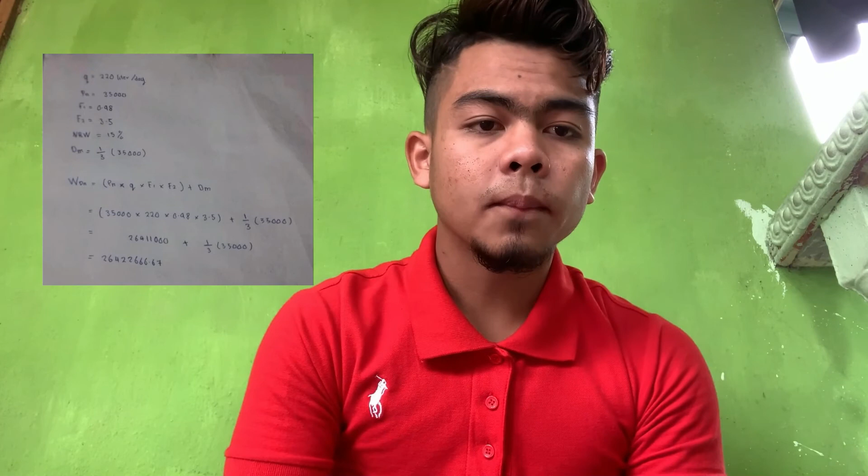The last question: if the water usage per capita is 220 liters per day, WDN needs water to be supplied for years 2020 with 35,000 people. Given a service factor F1 of 0.98, design factor F2 of 3.5, and NRW percentage is 15%. The industrial demand is 1/3 from population demand. Calculate the water demand WDN for years 2020.

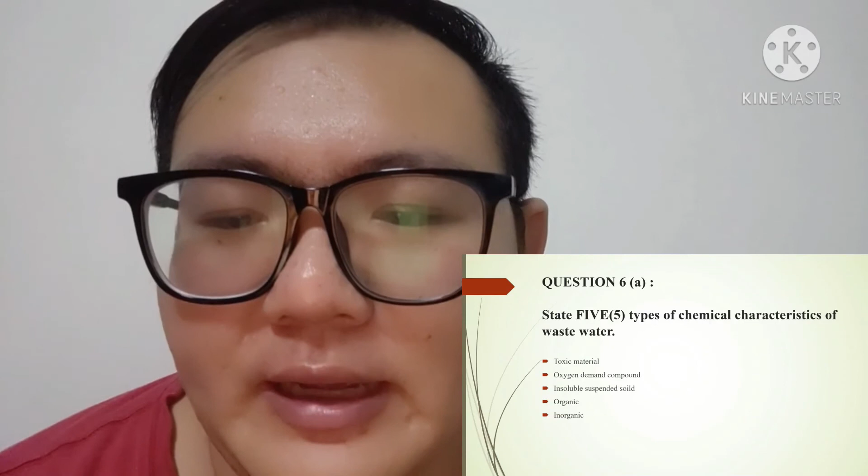Question 6A: state 5 types of chemical characteristics of wastewater. Number 1 is toxic material and oxygen demand compound, insoluble, suspended solid, organic and inorganic.

About question 6B, the initial state in wastewater treatment process is preliminary treatment. Describe briefly the screening process and grit removal process in preliminary treatment of wastewater. In pre-treatment, it is filtered to remove the large materials such as bottles, wood, cord, or cloth which may harm the operation.

The bar rack is all mechanically skimmed. Sand and grit are removed by gravity settling in a grit chamber. Below I have drawn the process about it.

About question 6C, illustrate how an individual septic tank works. It is used for individual and not centralized sewage treatment. It is a low BOD treatment since it has no circular aeration, so anaerobic process to decompose organic compounds takes place.

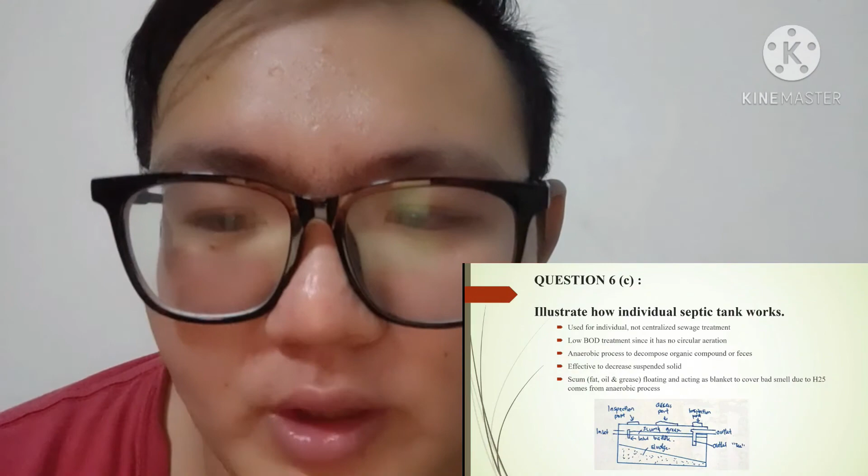Now I will answer the question that I choose, set 6 question 1. First question, list the function of separate and combined system.

Separate system is where the sanitary sewage and stormwater are carried separately in two sets of sewers. Separate system has two types of pipe: sanitary sewer and runoff sewer. This system is always used in housing and urban areas.

A combined system is a sewer that accepts stormwater and sanitary water. The sewage is then treated at a sewerage treatment plant. This system is mainly used in towns where the rainfall is less than moderate.

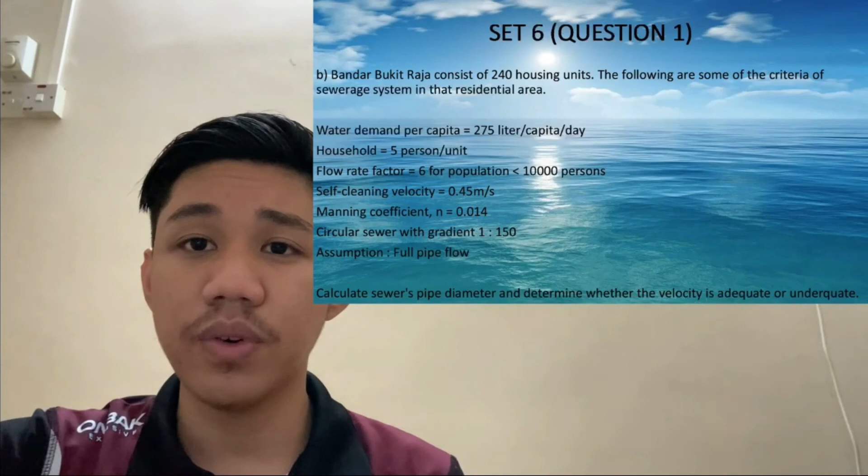Okay, second question. Calculate sewage pipe diameter and determine whether the velocity is adequate or inadequate. The detail and info has been given above. Now we go for calculation. We can use many equations, there are 4 methods we can use.

I choose the one at the very bottom. Now I will explain N, V and S. N is the Manning coefficient, 0.014. V is velocity, 0.45 meter per second. S is for circular sewer with gradient 1 in 150.

After calculating, we get the sewer pipe diameter is 4.077.

Next step is we take the housing units, 240, times water demand per capita, 275 liters, and household, 5 persons per unit. After multiplying all that, we get 330,000. The last step is 330,000 times the sewer pipe diameter, and the answer is 1345.410, which is adequate.

For the last question, propose 5 ways to prevent infiltration and inflow in sewerage system. Number 1, sealing manholes and replacing leaky covers. Number 2, using cured-in-place piping, trenchless rehabilitation or chemical grouting to seal up leaks, and open cut replacement of pipe.

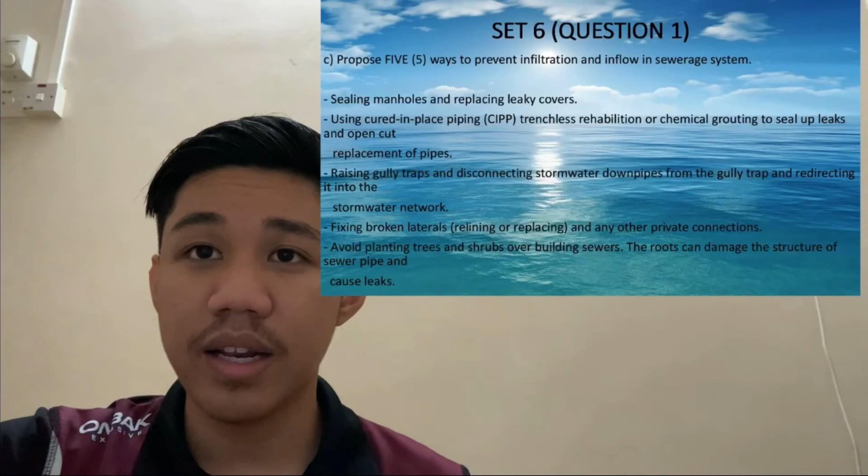Number 3, raising gully traps and disconnecting stormwater downpipes from the gully trap, redirecting it into the stormwater network. Number 4, fixing broken laterals like relining or replacing any other private connection. Lastly, avoid planting trees and shrubs over building sewers so the roots don't damage the structure of sewer pipes and cause leaks.